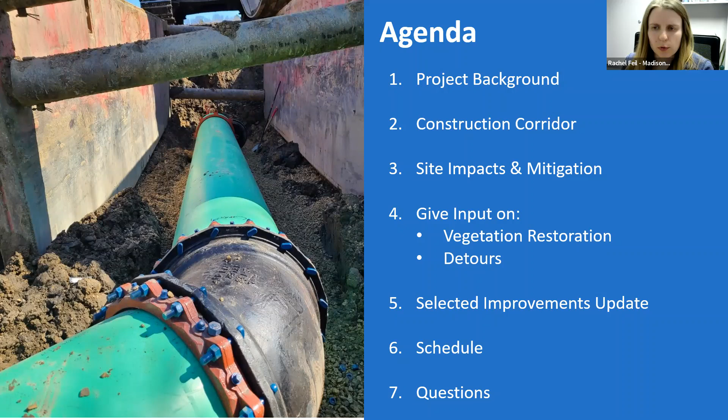Here's our meeting agenda. We will begin with a brief overview of the district project and the district itself. We will discuss the anticipated construction corridor, including primary access locations and work areas. After that, we will share the site impacts and mitigation. We will give an overview of in-progress site restoration and detour plans for your input. We will also update you on selected project improvements, and conclude with a general schedule update before questions at the end. Let's get started.

The Madison Metropolitan Sewer District was created to protect the environment through treating wastewater. The district now serves more than 400,000 people in the cities, towns, and villages in the greater Madison area. We have over 145 miles of pipe that convey wastewater to the Nine Springs wastewater treatment plant, located in Madison.

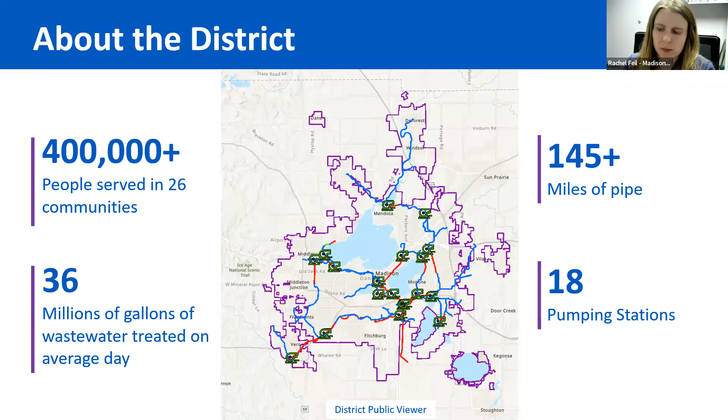That wastewater sometimes flows by gravity, and in other cases it's assisted by pumping stations and force mains to overcome landscape topography. Here's an image showing how a force main works.

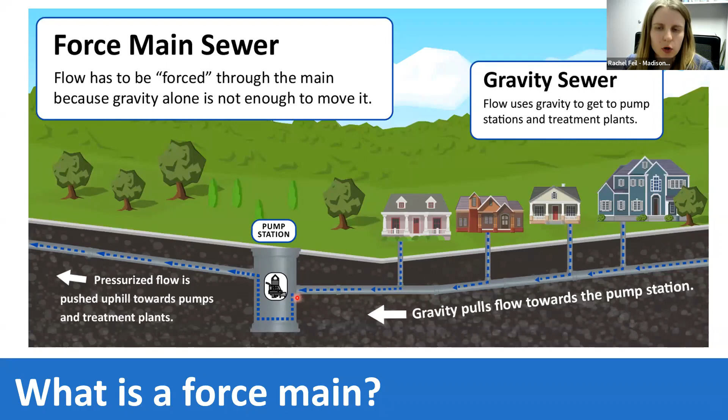Looking at this picture, on the right is a typical home. When you use the water at your house, that water is conveyed by gravity and enters a larger pipe. Again, that water is not stormwater or surface water, but wastewater. That larger pipe eventually flows into a pump station. The district pump station in the city of Verona is known as Pumping Station 17, where the pumps pressurize the outgoing wastewater, sending it uphill.

There is already one active district force main in the Verona area that currently conveys wastewater to the treatment plant. That existing force main is shown here in red and was constructed in the 1990s. As you know, the Verona area population has grown since then and has been one of the fastest growing areas in the state. The west side of Madison has also grown and is continuing to grow. If we do nothing, we will exceed the current capacity of the single existing force main in the near future, meaning it will not be big enough to carry wastewater flows to the plant and could lead to potential sanitary sewer backups and overflows.

To avoid that from happening, we need to add a second or relief force main to help carry additional flows that the one force main alone cannot carry. The first phase of this relief force main was installed in 2001. The pipe stopped north of Arborvitae Place, so phase 2 needs to connect there. On the downstream side, we also need to connect to our existing sewer going towards the treatment plant.

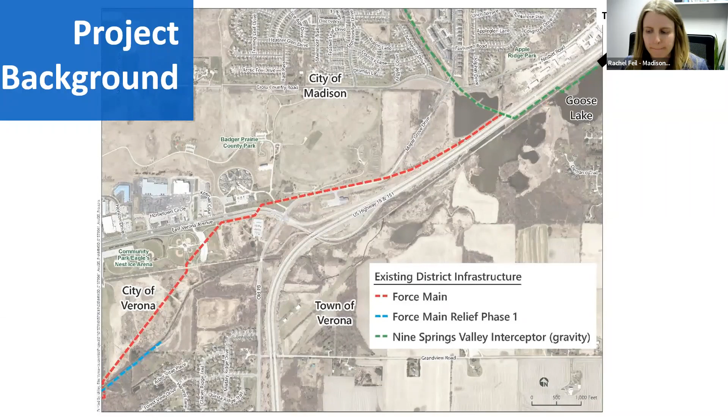The first public information meeting involved route selection, and the second meeting helped refine the existing route.

The final sewer route is over 2 miles long. Most of the sewer will be force main, shown here in red. The force main will transition at a natural high point to a gravity sewer, shown in green, for the remainder of the length. This map only shows the final sewer route.

In order to construct that sewer, we will also need staging areas for material and equipment, as well as access locations.

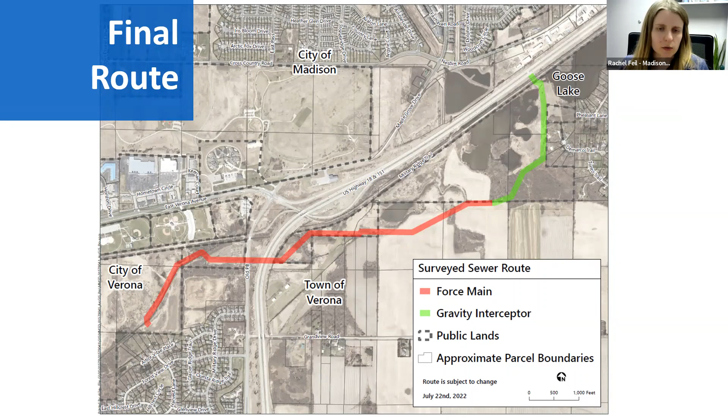That brings us to this map. Here's an overview of the anticipated construction corridor. This is the area where you may see construction equipment, material, and crews. Again, this includes the sewer route plus access and storage locations. The anticipated construction corridor for the Badger Mill Creek paved path is also shown here as well.

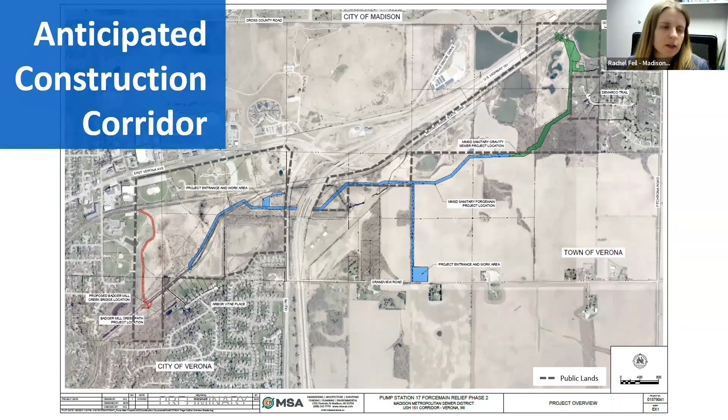In terms of access, for the sewer project there is anticipated to be 2 primary access entrances for construction. The first primary access is off of Old PB, adjacent to the community gardens for work west of US 18-151. The second primary access is anticipated to be along Grandview Road at a private property there, to allow access for the area east of US 18-151.

There will also be 3 anticipated secondary entrances for the sewer project. Secondary entrances will be blocked off for most of the project and will be used only when work is going on adjacent to that area.

The first secondary entrance is anticipated to be off of Old PB for installation of the sewer underneath the highway. The second secondary entrance for the sewer project is up along US 18-151 for the connection work that's needed there. And finally, the last anticipated secondary entrance is anticipated to be Pheasant Lane, again just for the adjacent work needed to widen that trail there.

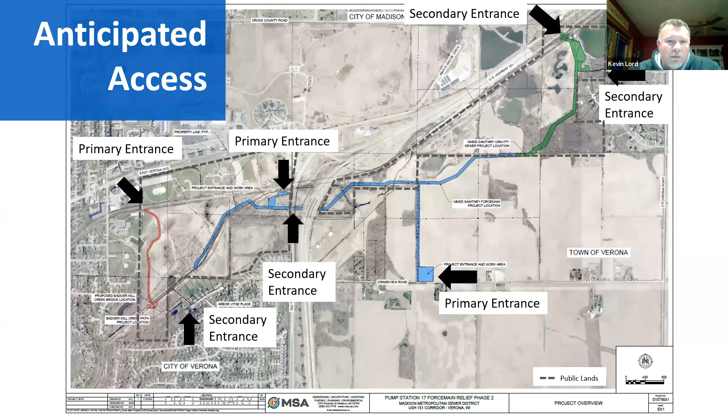In terms of wetlands, this project has completed surveys, and the DNR and Army Corps of Engineers have been consulted to best minimize impacts. We have planned the anticipated schedule to maximize winter work for minimal wetland disruption. Additionally, we will be using best management practices where possible to avoid compaction, disturbance, and control erosion. Finally, we do plan on restoring and mitigating wetlands post-construction, and as part of this construction we plan on purchasing credits from a wetland bank.

In terms of waterways, we have coordinated with the DNR on needed crossings for the project. There will be 4 crossings of the Badger Mill Creek. The stream banks will be restored immediately following construction and ultimately restored to existing conditions, and any habitat improvements such as rock deflectors and log deflectors that are present today will be restored.

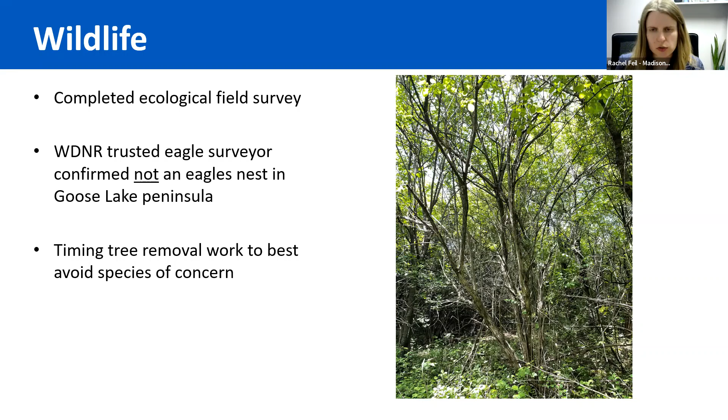In terms of vegetation, you may have noticed along the corridor, if you walked it recently, round metal tags on the trees. These represent surveyed trees that are inventoried and tagged. Doing this allowed us to avoid high quality tree species such as oaks and hickory, which support native savanna restoration, and focus our impacts on low quality species such as box elder and walnut.

We are currently exploring reusing the trees that we remove in some fashion. And for trees to remain, we plan on using arborist recommended tree preservation techniques to protect trees from damage.

Finally, the inventory that was done, I will be sharing with you here tonight and in the following day. This will be available to the public in our online viewer. Knowing from the last phase and previous comments, trees are definitely important to the public, so we put this view together as a resource for all.

I do want to stress that this tool is anticipated to communicate what we know today. Sometimes in construction, there are unanticipated situations that may arise requiring removals. We will do our best. What is shown in the tree inventory is our intent, and we have worked with adjacent landowners to the extent possible to avoid trees that are most valuable to them.

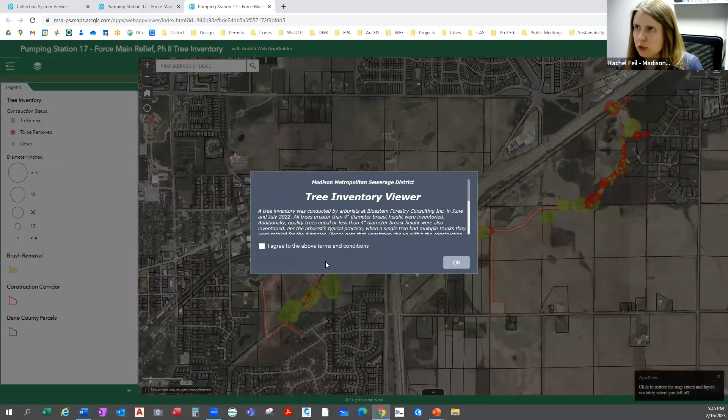Let's go ahead here and open it up. On the first screen, you'll see a splash screen that has additional information if you are interested in reading more. After you hit OK to that, you can come in here and you can see the legend.

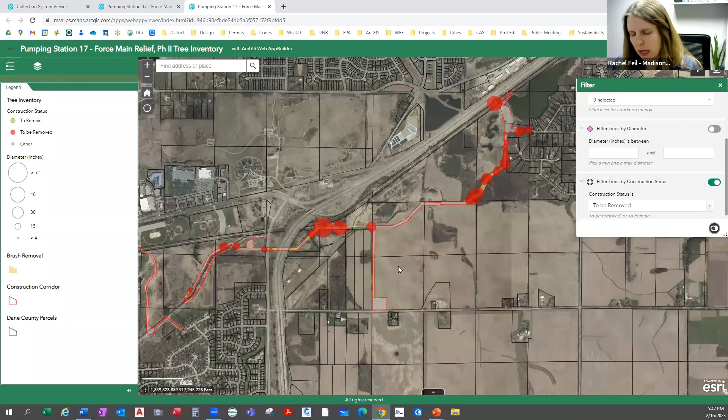Just to show you the proof is in the pudding in terms of focusing impacts on low quality trees, there is an infographic on the right you can turn on, looking just at trees to be removed. You can see that the majority of trees being removed on this project are walnut, box elder, and cherry.

I do want to take a moment here to acknowledge that beyond the quality of trees, trees may still be valued in different ways for their shade, cooling, wildlife cover, etc. There are lots of ways to value trees beyond their quality. So now I will turn it over to Teresa to talk about Dane County's long-term goal for their property.

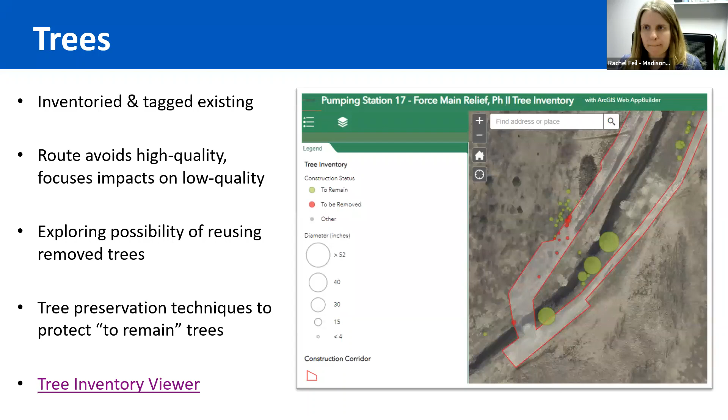Thanks, Rachel. I'm Teresa Nelson with Dane County Land and Water Resources Department. Since most of the project corridor runs through county-owned land, we have worked closely with Rachel and MMSD to lessen the impacts to our properties. This project gave us a chance to think more about restoration for this area as well.

Dane County's goal for restoration of this corridor and the adjacent county-owned properties is to return it to its historical landscape, which was mostly wetland and oak savanna. Both of these ecological communities are composed of very few, if any, trees. The wetlands in this area were historically dominated by sedges or grass-like plants. Savannas were mostly composed of prairie plants and some fire-resistant tree species like oaks and hickories.

We are really pleased that MMSD, the project team, went to great efforts to avoid impacts to those tree species along the sewer corridor, as Rachel just showed with the tree inventory there. It is very important to protect and restore these types of landscapes.

Dane County has lost well over half of its wetlands over the last century, and oak savanna is one of the most threatened ecosystems in the Midwest, with less than 0.01% of the original savanna still intact today. Wetlands provide numerous benefits, such as reducing stormwater runoff and flooding, removing pollutants, and providing important wildlife habitat. Oak trees themselves provide habitat for hundreds of species of butterflies and moths.

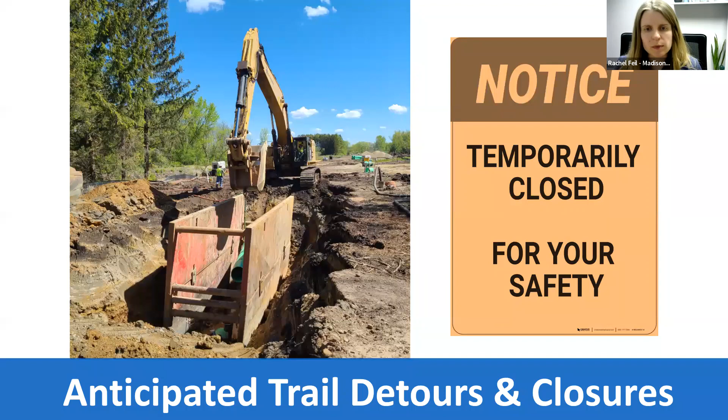We encourage you to explore other natural areas that are open during that time. In general, when closing and detouring trails, the plan is to install advanced signage where possible, have detour maps when applicable, and send communication out to appropriate groups in advance. I'll turn it over to Kevin now to share more. These anticipated trail detours and closures will be available on our public website, again, for a comment period.

All right, thanks again, Rachel. Our first detour is the Military Ridge State Trail near the Goose Lake area. As Rachel mentioned at the beginning, we will be connecting to the existing Nine Springs Valley interceptor that is along Highway 151. Coming in from the southerly side, we'll be crossing this trail with the project.

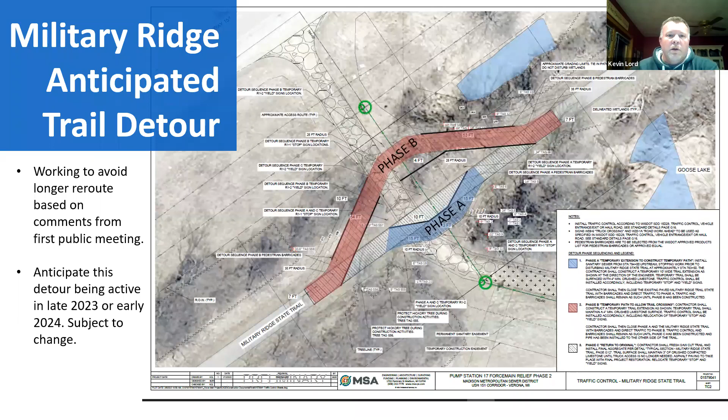On the west side of the project, the Badger Mill Creek path, we are not going to be touching that trail. However, that is the construction access across the Military Ridge State Trail, so it's anticipated to stay open throughout construction. There's planned local traffic control in place for construction traffic crossings, potentially stop signs, flaggers, or a combination, depending on how consistent the traffic is through the area.

On the south side, the Badger Mill Creek path that exists up to Arbor Vitae Place will have periodic closures anticipated between Lincoln Street and Arbor Vitae Place, depending on the exact construction techniques and what's happening with the bridge construction and path construction on that south side.

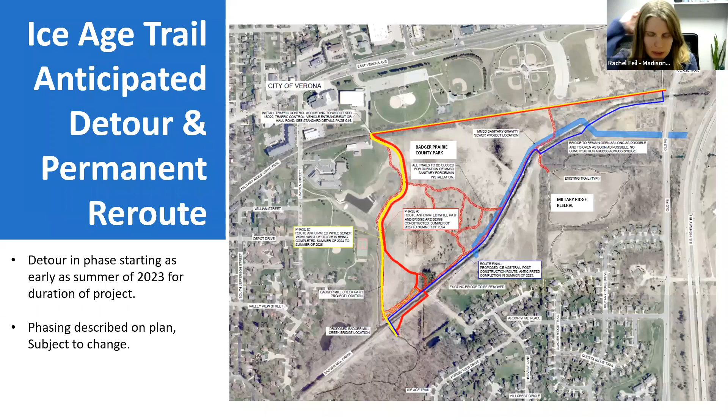We've worked with Dane County on this map, basically the same one as before. The intent is to show what's marked with the hatched red line—these are numerous paths within these parks that we've identified from aerials and site walks. The intent is that these paths would be closed during construction.

The main route from this area will utilize the Ice Age Trail detour route to get north to the parks and beyond. We'll work with the county if there's a plan and time frame to keep these paths open to the extent possible, but in general the plan is these paths would be closed through the construction period.

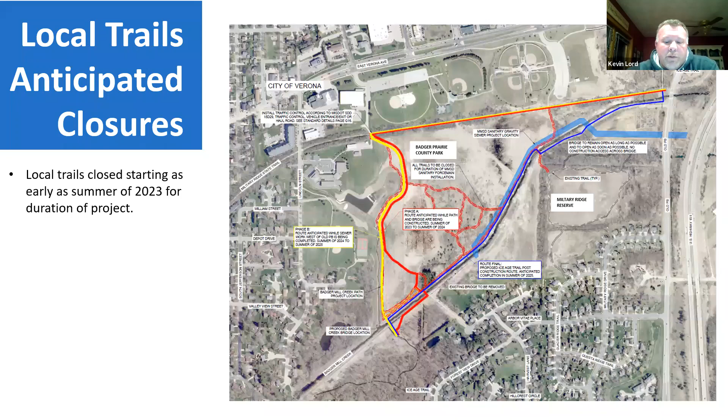One note I'll add: as you go through the restoration plans Rachel mentioned, you'll see these paths are planned to be restored. Anything we cross within the construction corridor, we've worked with Dane County on path locations and restoring them. But during construction, the anticipation is these would be closed. Also, the path around the peninsula, though not exactly shown here, would also fall into the closures.

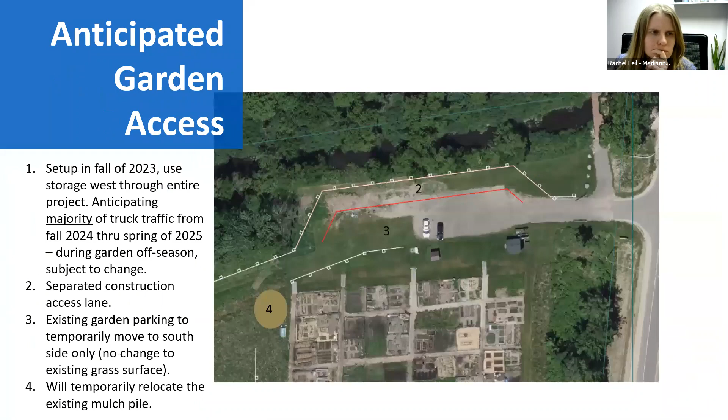For garden access, the majority of construction work in this area, on the west side of Old County PB, is anticipated for fall 2024 through spring 2025. However, there will be work prior to that, even this summer, for material storage, tree removals, and other things on the west side of the project.

We anticipate a separated construction access lane, shown as the red line, anticipated with some barrels of sort. The intent is it won't impede drainage in the area but will allow gardeners access with as little conflict with construction traffic as possible. So gardeners to the south, construction traffic would travel between the red line and the white line above it.

During construction, the mulch pile, shown as number 4, will be temporarily relocated. The gardeners' parking would be allowed to remain basically as it currently exists, adjacent to the garden.

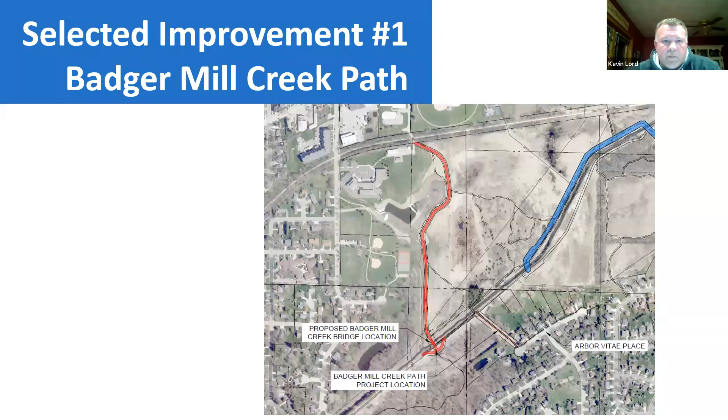Thanks, Kevin. I see we have Chad from Ice Age Trail Alliance here on the call tonight. Chad, would you like to share your thoughts on the final Ice Age Trail alignment? Chad, you're on mute.

The Ice Age Trail final route post-construction is intended to be this dark blue line on the north side of the creek, before crossing on the existing bridge to run south, basically along the creek there, before finally crossing north to this bridge.

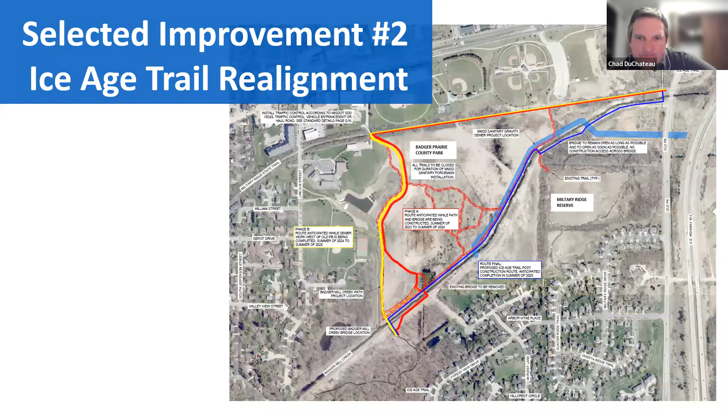Yes, hi Rachel, sorry about that. This is Chad DuChateau, Director of Trail Operations with the Ice Age Trail Alliance. Rachel clearly laid out the decided final route that we worked with the community on, taking in public opinion. The idea would be to restore the trail along the north side of the creek, then utilize the new bridge to the south as a crossing point, aligning with the existing boardwalk on the south side of Badger Mill Creek, continuing on the north side to the existing bridge in the north, then crossing over the creek and following the corridor between Badger Mill Creek and the existing forested area as a mowed path through that corridor, looking to do some enhancements from a landscape standpoint. That's all I have.

Thank you. Selected improvement number 10 will also move forward, and this area overlaps with an anticipated work area that will be disturbed with construction. The area post-construction will be seeded with native prairie seed mix and maintained for a few years following. Chris Barnes, I see you're on the call, I didn't know if you wanted to add anything additional.

Thank you, Rachel. This section travels fairly close to Goose Lake, an area the county currently maintains for passive recreation. In the near future, we'll be working on some improvements to the outfall of Goose Lake for storm drainage, but that's not included as part of this project at this time. Also, the access will be minimized from US 151.

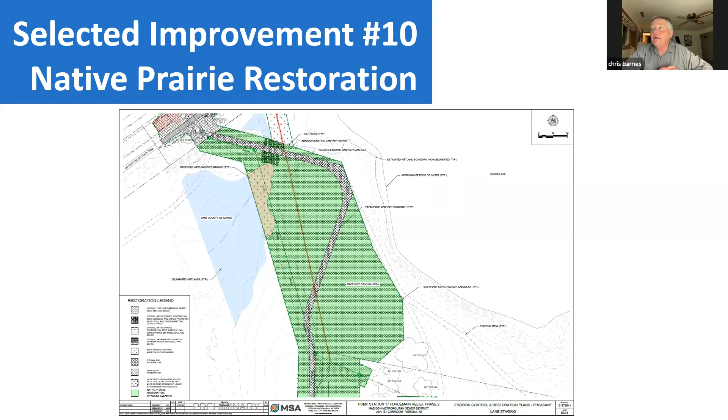That brings us to our next improvement, number 11, which will also move forward. This will widen an existing local trail to make it a bit wider for maintenance access. Underneath the vegetated surface, we'll place rock to provide stability for Dane County, town of Verona, and the district for maintenance. Currently the only access point for maintenance, other than squeezing between two pedestals on DeMarco Trail, is really off of US 18-151. By widening this trail as shown, it would improve long-term safety and minimize maintenance trucks crossing the Military Ridge State Trail. There will be some tree removals as shown here, the majority being walnut, cherry, and box elder, and the surface of this trail will be seeded with grass turf, with the intent to grade to match existing.

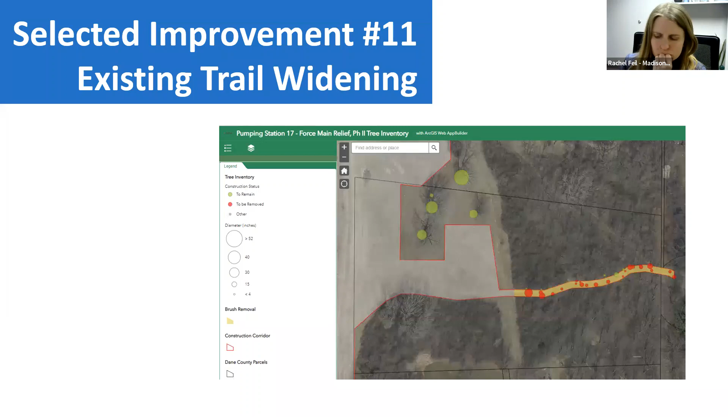Okay, next steps for the project include reviewing the input you provide on the in-progress restoration and detour plans, obtaining permits and easements, completing detailed design, and finally bidding and awarding the project to a contractor.

The anticipated schedule is very tentative at this point and subject to change, but here is an overview of those milestones. The project contract documents are tracking completion in May.

At that time, the project will be publicly bid. A contractor will be on board for the last public meeting in July. The contractor would then start work as early as this fall, pending weather, materials, etc. The intent is to start both the sewer and the path work right away. The path would tentatively be complete in summer of 24, with sewer work being completed the following summer of 25.

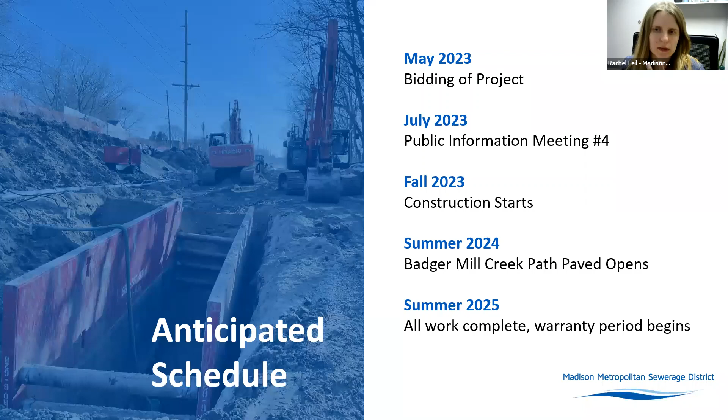I want to stress this is subject to change, but we've been getting a lot of questions on the sequence. So here we are anticipating today that the contractor would follow a sequence with this work as shown. Again, this is subject to change based on weather, materials, and even the individual contractor's site approach.

In general, we anticipate that all silt fence installation, brush and tree removal, and the material to really show up this fall and be in place this fall.

Generally, sewer installation we're anticipating it to start at the downstream end here and take fall into winter, and from there the work would really progress west. Concurrently, we anticipate the contractor to work on the bridge replacement and path along the Badger Mill Creek. The intent again is that the path would be open summer of 24.

Continuing on with the sewer work, you can kind of see how the rest of it progresses. Again, I want to emphasize all the dates here are tentative and subject to change, but this is what we are planning at this time.

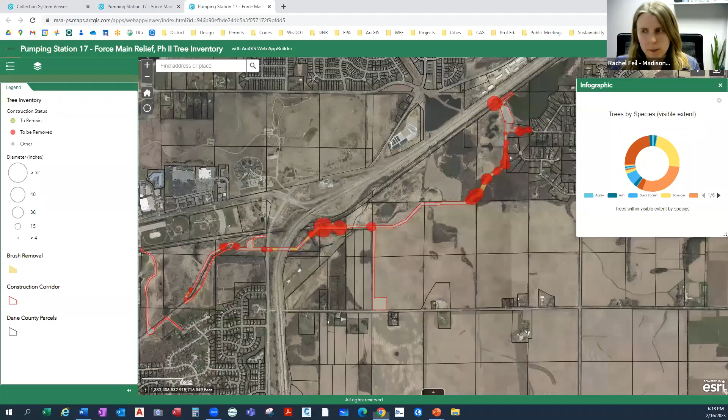And you'll see, let me see if I can bring it up here, the tree inventory viewer. We are looking to preserve some of these here, shown in green. We again can't make promises, but if we can preserve more, we will. That is the intent there. We are aware of this concern, and we're trying to leave what we can. Obviously the construction will take room, but that's what we're doing at this time.

And I see your comment. It says you are not allowed to post comments to everyone. Sorry, no problem.

And if you'd like, Daniel, I think we can talk offline further about your property and the trees, but I would first say take a look at the tree inventory viewer, and we can talk offline further.

Another question: is there a reason the yellow line follows the tree line as opposed to going through the open meadow? Oh, you're saying the route. Why does the route go here versus the open meadow? Well, that's a great question.

When you're designing a route, there are trade-offs. Down here, we actually did first look at that, but there are wetlands down there that we are trying not to disturb. Also feasibly, it's too shallow down there for the pipe needed cover, so this area a little bit up on the hill is the best location. And if you're familiar with this area, there's lots of honeysuckle to take out along the way. So that's the intent there. But that's a great question, we actually did look at that, trying to stay on that existing path as well.

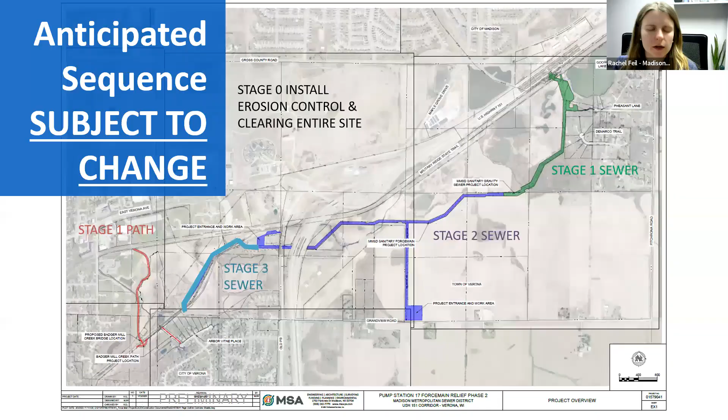In terms of one small change you may see in the trail network: for this path here, we're looking to basically relocate this stretch down here that goes through wetlands and doesn't allow the wetlands to expand long term. We're just relocating that up here when done, and then also adding a grass portion here. So that way we continue on with that network of trails, but the intent is to restore where these trails are today as grass. We understand that's utilized by the community and something we want to continue to support.

How does the future storm drainage work at Goose Lake affect the corridor improvements and the force main work being done now? I don't think it affects it. Chris and I have been talking throughout this project, he's aware of this project. We've essentially planned for space above our pipe. So that would be my response.